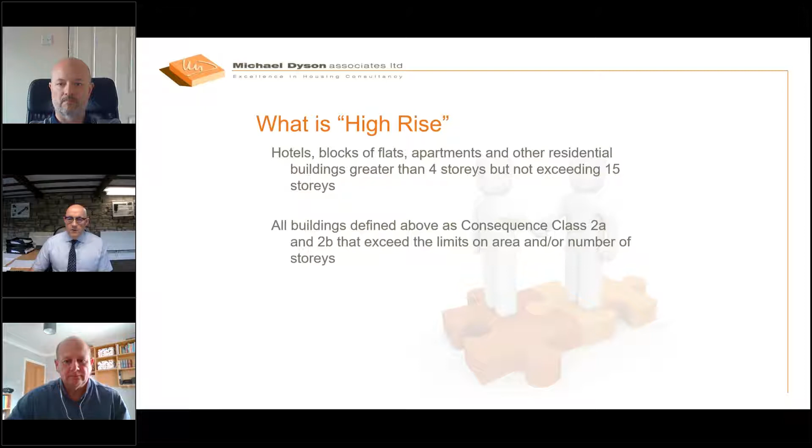Okay, what is high rise? It's an important distinction because there are some differences in the way high rise is looked at. Since 1968, it tended to be anything over 5 stories, because the BRE was gathering information post Ronan Point, and they used 4 stories and above as a demarcation. But the major repairs allowance parlance is blocks of 6 or more stories. The home quality mark by the BRE refers to anything over 18 metres, but crucially, the building regulations refer to anything over 5 stories, and that's specifically in relation to disproportionate collapse, which does need consideration, and it's something I'll be touching upon later. So in terms of what constitutes high rise, it's around about 5 stories.

Then we had the tragedy at Grenfell, and suddenly there was a focus on an 18-metre mark, and all the mandates, letters and guidance focused on 6 stories and above. So we've got a little issue here: in terms of applying cladding and designing cladding and thinking about how it will perform, it's 6 stories and above, greater than 5 stories, or 18 metres. But interestingly, when you're considering the structure upon which you're hanging this cladding, you need to consider the 5th story as well, because that's a demarcation as far as disproportionate collapse goes under building regulation A3.

How many have we got? Well, I was struggling with this. I've looked at all sorts of sources, and the MHCLG currently publishes around about 12,500 high-rise residential blocks in the UK, of which 6,000 are in the social sector. There's no real definition on that. Reading on the subject, research by a chap called Michael Stratton says that around about 6,500 high-rise blocks were built post-1945 in the UK. But of course, there have been demolitions which have reduced that number. Current thinking, evidenced in various reports, is there's around about 4,000 high-rise residential blocks in the social sector at the moment.

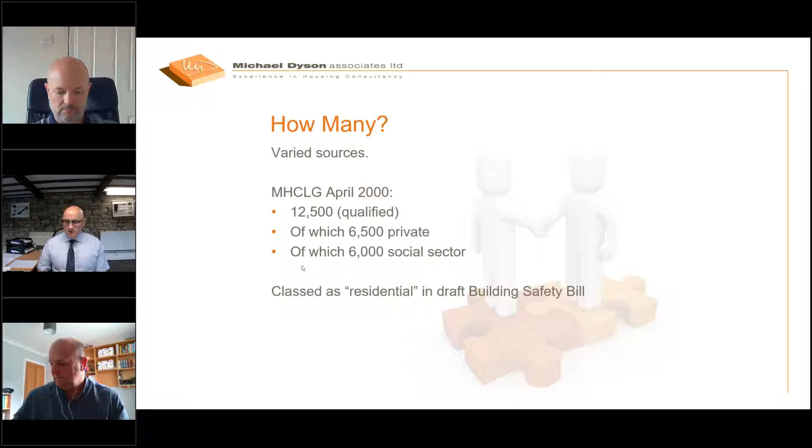So, why do you want to do it? Why would you want to reclad these blocks?

Well, there's a general trend here, and it's primarily to improve thermal efficiency and resolve the damp issues which are generally associated with 1960s and 70s design and construction. There are also benefits in protecting the substrate. These things have got envelopes in their original form or in later forms that probably don't perform as well as they might do.

So your new cladding system might be seeking to protect that substrate. If you're already spending money on responsive or even cyclical maintenance of, say, pointing or large areas of these blocks, then it's very tempting to want to put a cladding system on to get a fix and forget solution for the next 25 years. There's also the aesthetics to consider.

Obviously, we want them to look better. A lot of these things in their original form are quite ropey and unattractive. There's also considerations of other big investments. Why not put cladding alongside that, such as re-windowing or re-balconing these blocks?

And last but not least, certainly since Grenfell, there's the fire resilience issue associated primarily with aluminium composite materials, high-pressure laminates, and the presence of cavities and absence of fire breaks on these blocks. So there are lots of good reasons to want to invest in these blocks by recladding them.

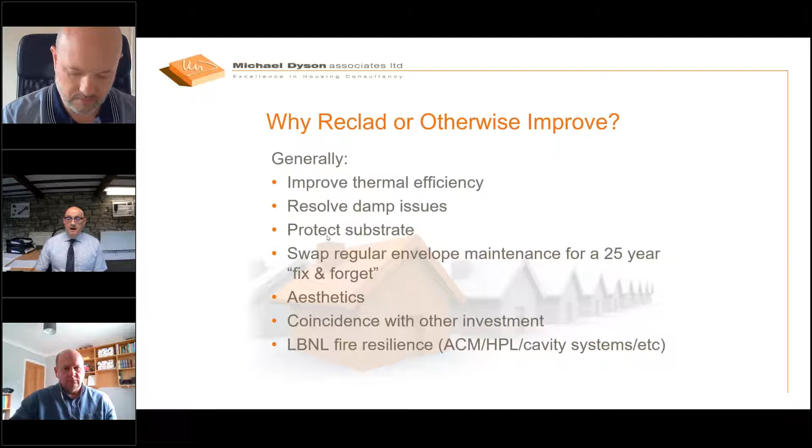Okay, general issues to consider. This is granny and eggs time. This is speaking as an engineer. This is more your remit than mine as housing managers and owners of these blocks.

But first of all, are these blocks viable in the long term on a business proposition? You need to think about current demand and changes in demographics. Do we want an elderly population rammed up on the 15, 16 stories of these blocks?

Also, a lot of these blocks require significant investment before you can actually work on them. So are they currently fit for purpose? And if not, what's that going to cost to deal with them?

And they are quite expensive to own. You've got conventional responsive repairs and so forth, but they tend to come in big hits, you know, wholesale renewal of kitchens and bathrooms, wholesale renewal of lifts, heating, power plants and so forth.

A lot of the blocks have concierge or security requirements. And also waste management. So they are quite expensive to own, and you need to balance that against the cost of doing something else.

And something that's sort of prevalent in social housing is the presence of leaseholders within these blocks. I'm sure you're all aware of the Section 20 provisions, and these people should be contributing to the upkeep of these blocks, but quite often they end up being investment blockers because they don't want to spend any of their own money. So that's something else to consider in general terms.

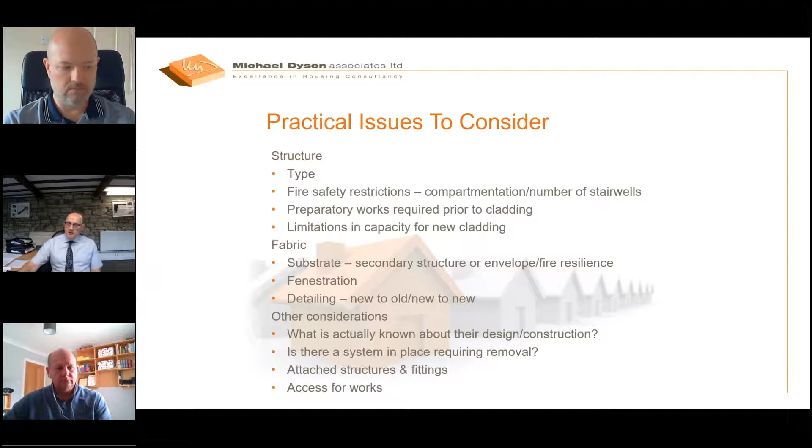And last but by no means least, in other considerations, you need access to do work to blocks. Do these blocks lend themselves to having mast climbers or scaffolding or other means of access readily available? And what provisions do you need to make, and how much will that cost before you can actually start sticking things onto the wall?

Let's talk about structure. I've just used two general types, framed and shear wall or cross wall construction. Frame structures tend to be steel or concrete, and shear walls and cross walls tend to be concrete or concrete and another material. But quite frankly, in our experience, it's mostly concrete. And in frame structures, you have in situ concrete frames, and in shear wall or cross walls, they tend to be large panel systems or LPS.

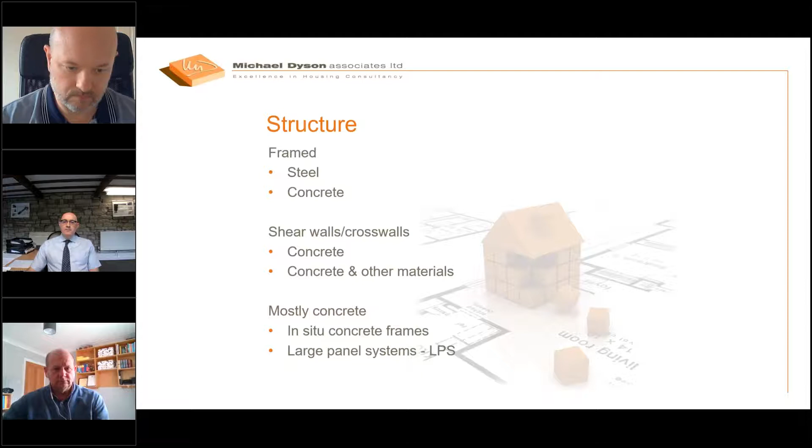Frames are more resilient against disproportionate collapse because they offer alternative means of rerouting loads in the event of distress, and they're generally well tied together in any event. But they only offer limited primary fixing points for cladding systems, such as the slab ends and the faces of columns.

Large panelled systems present issues relating to disproportionate collapse, and, again in our experience, they often require some kind of structural improvement. But they do offer broader fixing options for retrospective cladding, because by definition the envelope is structural. And for those of you not familiar with what these things look like,

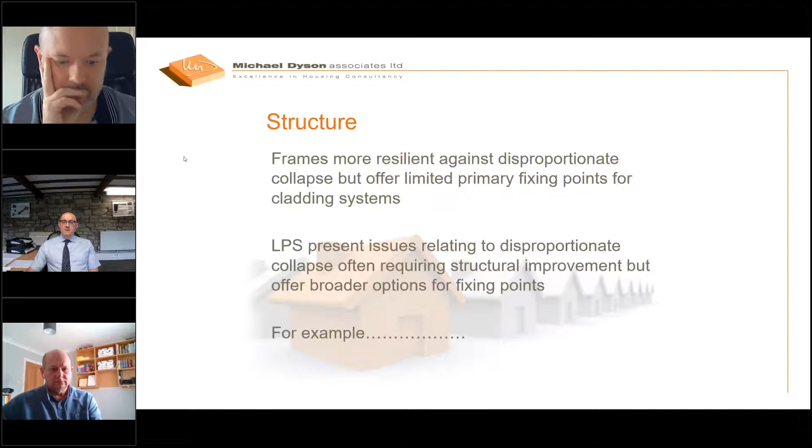I've chosen a Wimpey no-fines style of construction, which is generally reinforced in situ concrete frame, and between the columns is no-fines concrete to create walls, primarily on the envelope and also the compartment walls inside. And the whole shebang is usually overlaid with no-fines concrete and rendered over. There are exceptions to that.

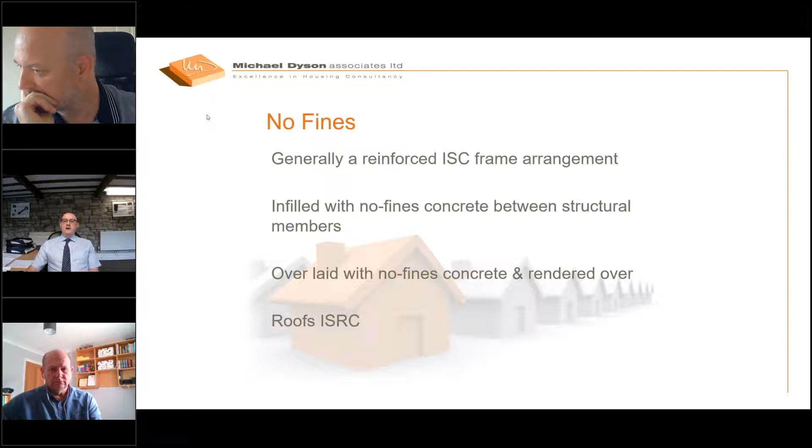We've seen no-fines blocks with brick outer skins, but in general terms, you can see a perimeter of a block supported by columns, and you've got columns within the footprint, which also provide the means by which walls are composed in no-fines concrete to create compartments.

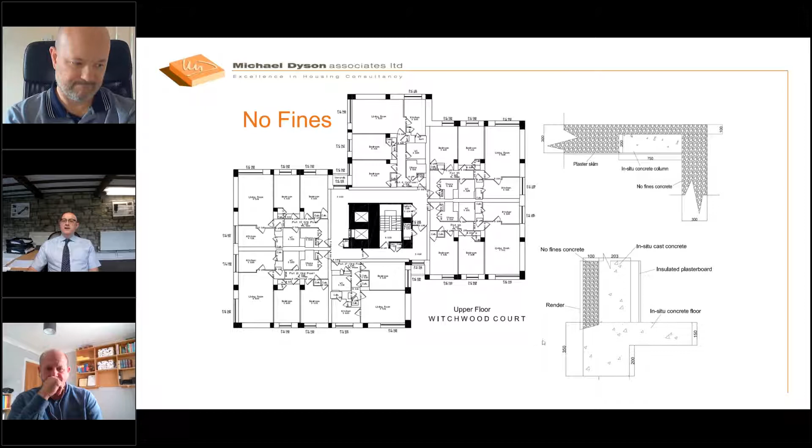And the way these look on plan is there's a column, and typically the no-fines wall, that's the outside, that's the inside, the no-fines wall will spread across the face of the column, obscuring it. And then on top of this lot, there's typically a rendered finish. And looking sectionally, it looks like that, which is basically a solid no-fines concrete wall placed between reinforced in situ concrete columns, joined monolithically to the reinforced concrete slabs.

I've chosen a typical LPS block of Reema to show you these. These are referred to as gravity structures. It's basically self-weight that holds it together. There are fixings between panels, between walls to walls and walls to floors, but these are more associated with putting them together, bringing them onto site and dropping them from cranes and locating them.

So there is some restraint offered by these fixing systems, but by and large, it's the gravity that holds them together. Therefore, there's a reliance on correct placement of the panels and what they call dry pack mortar, where they ram mortar beneath the panel feet to make it a tight joint with the floor. What does that look like?

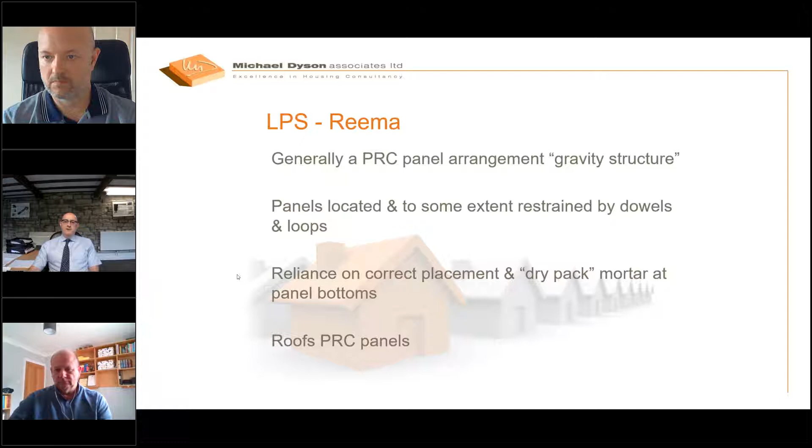Well, I picked a nice easy one. It's a big square, and we've got what we call flank walls. These are the primary support walls, you'd normally refer to them as gables. And then across, hence the term cross walls, we've got concrete panels creating the walls between and obviously forming good solid compartments. On the Reemas, we've also got walls running perpendicular to that, which spin from a central core, which sometimes is of in situ concrete, and on a Reema is generally in precast panels.

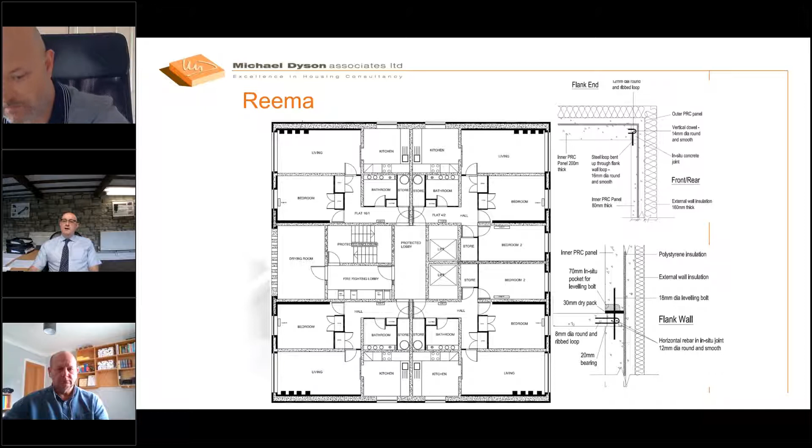Looking down onto a joint between panels, you can see loops that join those together, and looking through a cross section at the same point, you can see there are hoops that come from the floor. We've got dowels that run along between a cutout joint and then the dowels that you see there. And in terms of what they look like, that's not particularly tidy, but it is an effective joint between two panels in a Reema block.

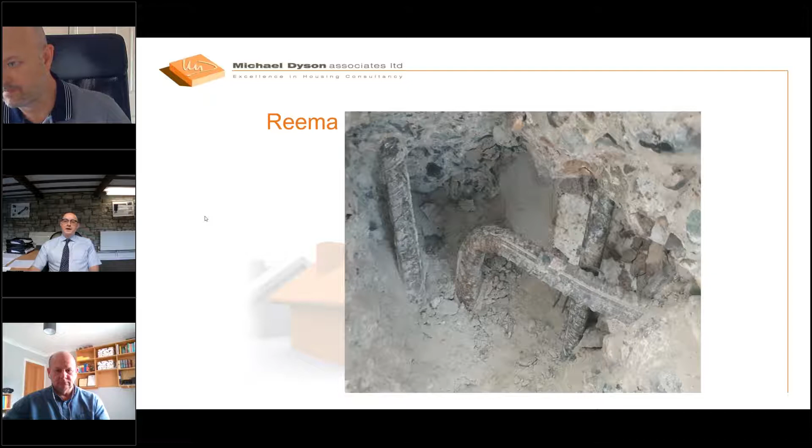I think at this point it's worthwhile talking about normal and accidental loading, because one of the key issues for large panel systems is disproportionate collapse. Normal loading is anything that's predictable. That's its self-weight, the use, that's the people, the furniture, the plant and so forth, wind loads, positive and negative, snow, and even retrospective cladding. Even though it's an eccentric load, it's still classed as normal because you designed for it. It's normal because you can understand what it's doing to the building and you can accommodate it.

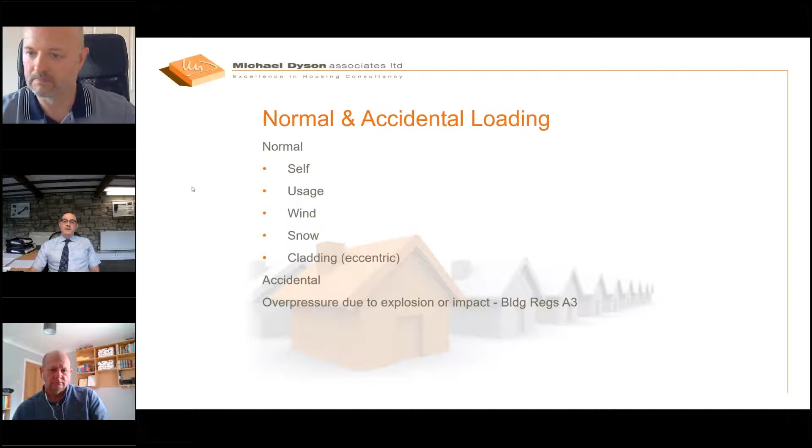Accidental loading is referred to as overpressure due to explosion or impact, which relates back to the building regulations. What that basically means is an unforeseen explosion of a certain magnitude. Town gas can exert something like 34 kilonewtons per square metre, and bottled gas can exert 17 kilonewtons per square metre. So we have benchmarks for how much overpressure a block can withstand without being able to redirect loads, and they're established in manuals that have been drawn up by the BRE, and they're referable.

So how do we deal with normal and accidental loading? Well, primarily through the original design. If you're looking at a block that was constructed in 1960, then it's been there 60 years. So by definition, it's coping with normal loading. You don't need an engineer for that. But if you're putting something new onto it, whether it's cladding or it's air source heat pumps or some mast installations for communications, you need to accept that as a normal load and accommodate that new load with some new provision.

Accidental loading is something quite different because it's unforeseen other than in its magnitude. So you're concentrating on tying and redundancy. If a structure can demonstrably be seen to be tied together properly and there are alternative load paths to be transferred in the event of a component failure, then you'll satisfy the requirements for accidental loading. And that's typically associated with framed structures. Unfortunately, with large panel systems, the panels are actually the source of the direction for loading. So if a panel goes, everything falls down and you get the progressive collapse that's associated with Ronan Point. And that's very, very difficult to overcome.

And so alongside introducing new measures such as tying and introducing columns and so forth to redirect loads, it's important to understand you can manage risk, the likelihood of occurrence. In the calculation for risk assessment, the outcome can be very, very severe. An explosion will be very severe in its outcome, its degree of harm. But if you can close the gap for the likelihood of occurrence by removing gas, by managing people taking bottled gas in there, removing people who've got medicinal gas and so forth, you are managing the risk and reducing the likelihood of occurrence. So there's a strategy that's structural and managerial associated with managing accidental loading.

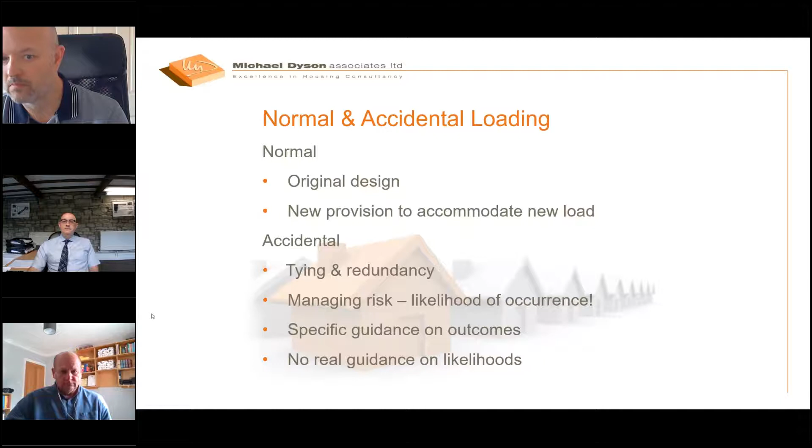What about fabric? Well, what's the condition of the fabric? Does it need stabilising, patch repairing? Do you need to retrospectively tie it back? Can you fix to or fix through? Can you fix through the fabric to a structural component, or do you need to fix to it? And if that's the case, you need to think about a strategy for making sure that envelope can carry the weight you're putting on it. You'll have issues with mason's openings to do with cold bridging and future renewals. If you've got a lifespan of a cladding system that exceeds that of the windows, you want to make sure you've got provision for replacing the windows mid-life of the EWI.

You'll have issues with rainwater management, not least if balconies are left exposed, you need to route the water somewhere. And also plain and simple rain washing down the outside of a block. If you've got absorptive materials, you'll end up with lots of staining and things like that. So think about things like that.

Think about the detailing. You're putting something on that's going to be of various thickness onto the outside. If you've got a fairly rectangular scenario like the Reema block, happy days, not a problem. If you've got something that's H-shaped or fairly complex in footprint, then you've got a lot of issues to overcome in detailing a relatively thick material and making it work in terms of applying it, in terms of maintaining thermal movement differentials, and also for maintaining fire breaks.

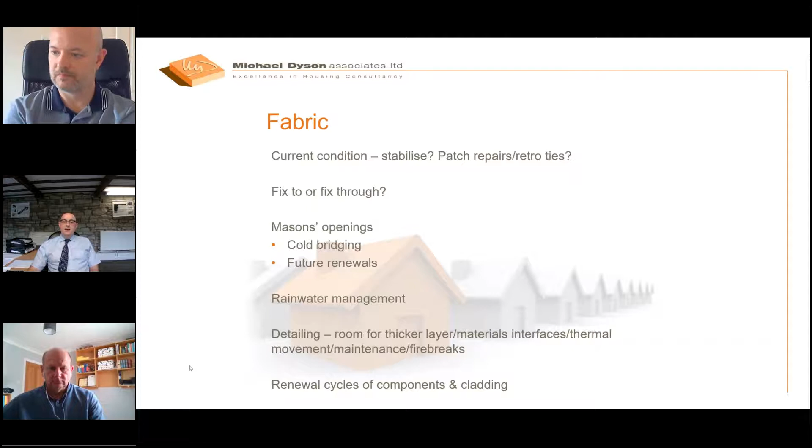So choosing the correct system. Again, in my noddy way, I've just broken it into two different kinds: rail systems, which go on rails, and direct fixed systems, which are stuck direct. Pretty simple, but essentially you get rail systems where the rail is fixed to the outside, and typically they're fixed to spanning systems, so they go to the ends of slabs, so you don't have too much to worry about the envelope, and they're generally referred to as rain screens or something like that. And the direct fixed system goes straight onto the outside of the envelope, an external wall insulation, EWI.

And amongst all the other things you'll think about, the primary ones are satisfying building regs, fire resilience, the ability to fix it to what you're fixing it to, the thermal characteristics, how you're going to maintain and ultimately renew it, what does it look like, and also warranties and insurances. A warranty is probably only worth the paper it's written on. What you really need to look at is insurance-backed guarantees and third-party products that will allow you to go beyond the life of the company that installed the product. So that's a quick canter through the things to think about.

So I think we can safely say that all systems will work, won't they? So what's the problem? Well, the real problem that we've found through experience is understanding the structural characteristics of the block that you're working with. If you don't understand them, then you won't fix the right product. You need to understand where you fix it on the structure to make sure it will stay there. And something that I haven't mentioned, but I've left till last, is workmanship, because we can design as much as we like, get that right, we can choose the right product. If it isn't put on properly, we'll have major problems. And workmanship has been an issue that the construction industry seems to struggle with.

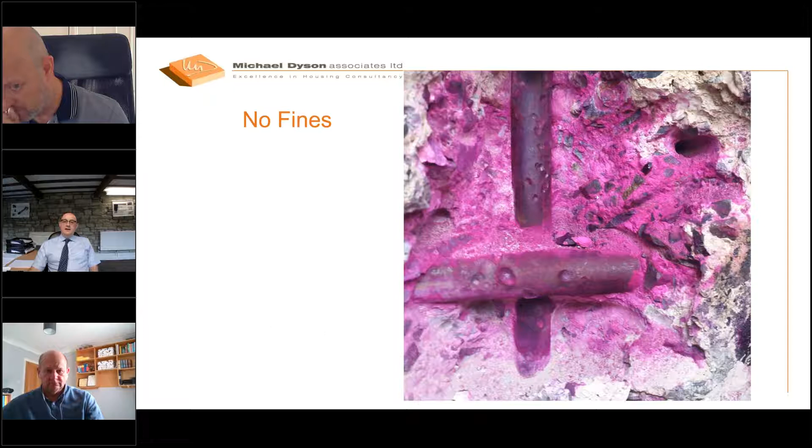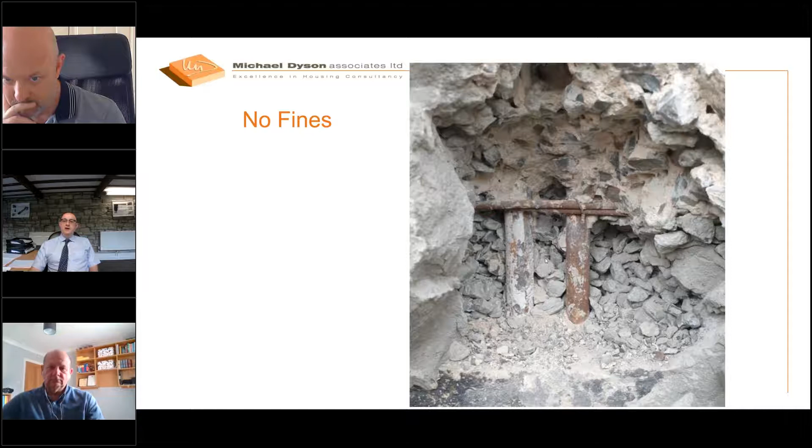You'll recall this slide from earlier showing you this lovely concrete and this lovely reinforcement. On the same block, on the same floor, 3 or 4 columns along, this column here has got the bottom missing because it's not been vibrated properly, the concrete hasn't dropped to the bottom, it's left the reinforcement exposed, and all you've got protecting that reinforcement is no fines concrete. Also, this reinforcement has got nothing supporting it in compression, so that's not really adequate as a resistance to downward forces.

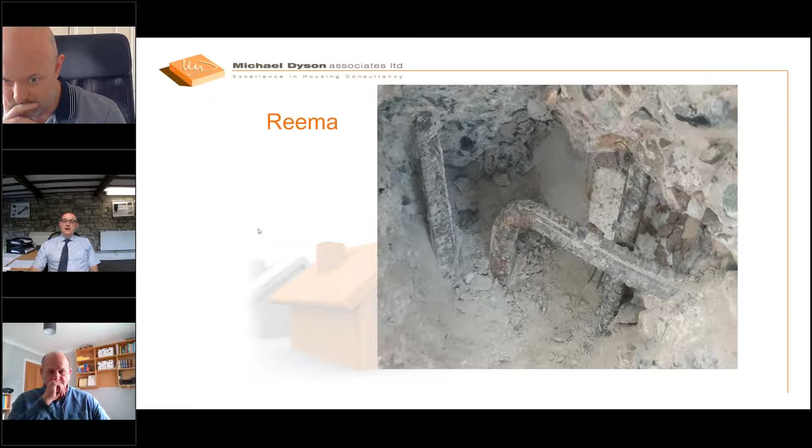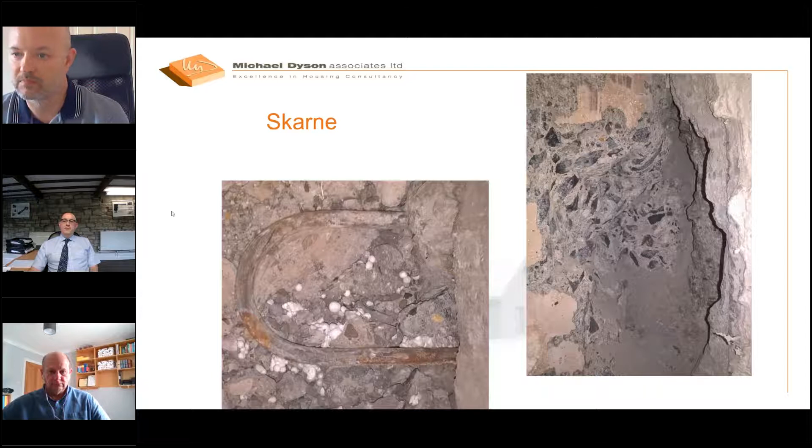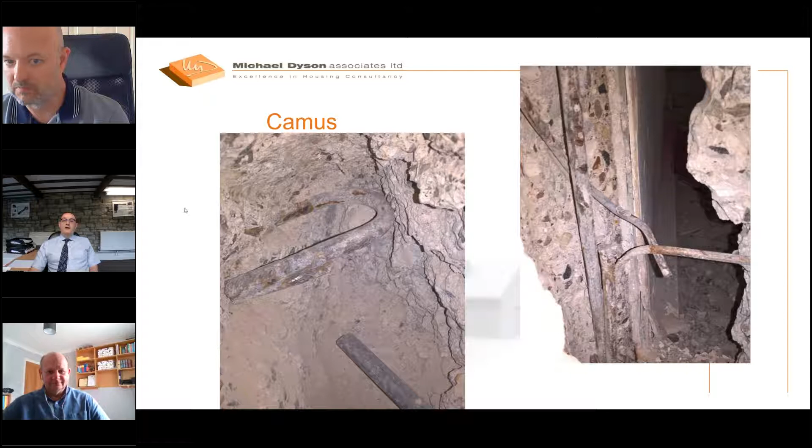On the Reemas, I showed you this rather attractive man-made joint here. Again, same block, we've got the hoop and we've got the dowel, and they're around about 50 millimeters apart. And it's not just on Reemas. We've got Skarne properties where there are hoops with no dowels. There are no hoops and no dowels. We've got Camus properties where obviously someone thought about it and decided not to follow through. And we've got my favourite. This is another Reema block. And somebody decided they couldn't get the two lugs to work together, so they've used a fork to try and wrap it around the two lugs coming into the joint.

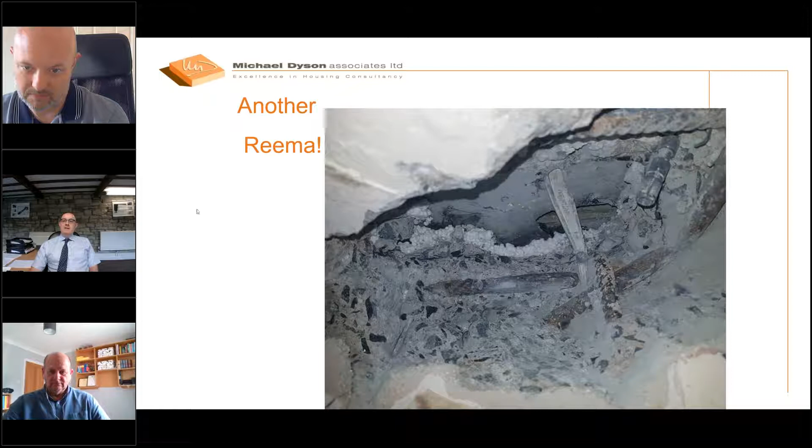At Grenfell, we're painfully aware of the workmanship issues there. It's widely publicised, so no need to dwell on that. But here's something interesting. This is from something that we've done within the last 12 months on one of our sites, where we notified the contractor that we were going to locate and test around about 70 fixings for pull tests, and we witnessed the installation and we witnessed the pull testing. And bear in mind that the contractor had fair warning of which fixings we were looking at. We had a 78% pass rate, which is a 22% failure rate.

So that's in the knowledge that Michael Dyson Associates are going to be looking at these. We had a massive failure. So you've got to ask yourself what was going through their heads when they did that. And what it has done is it's led us to the conclusion that we're going to have to do extra monitoring during the installation. So rather than just leaving them alone to get on with it, we're going to be policing this job very closely.

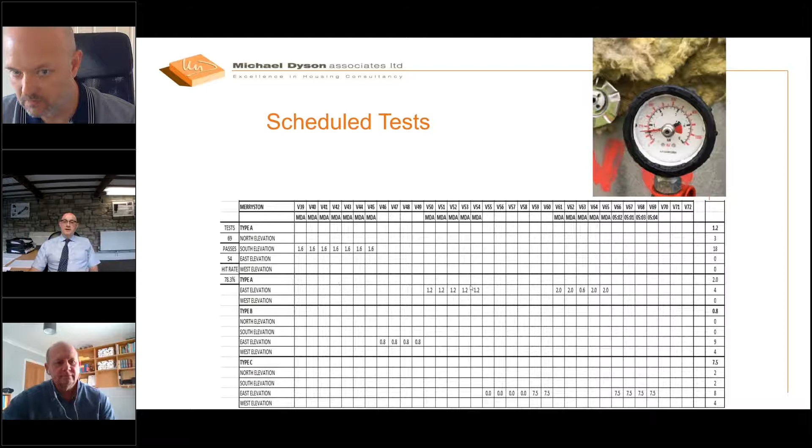So I'd like to close, hopefully approaching 20 minutes, with a to-do list. And the to-do list is this. First of all, substantiate your business case. Very important, verify the structure and the fabric of the blocks you're looking at and test its structural capacity. We then recommend you test its resilience in fire. That's the substrate and the new cladding. And we recommend the involvement of a fire engineer, which will probably become mandatory in any event.

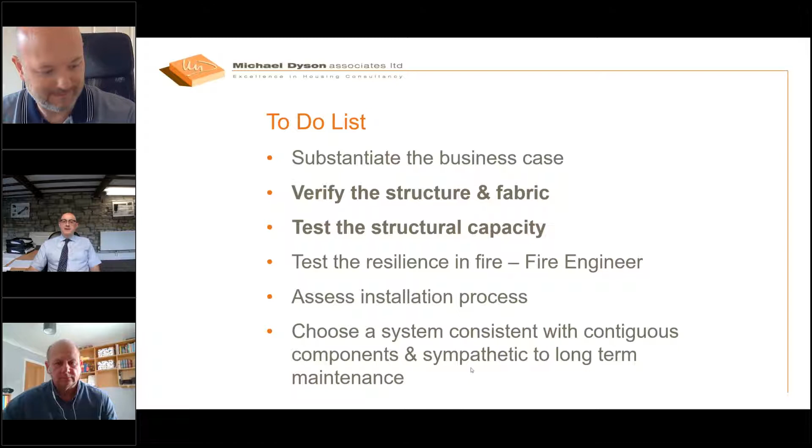You need to look at the installation process and say, can it be done? It's okay drawing something up on a tech sheet and saying your spacings are this, but when you're looking at 60-year-old concrete and 60-year-old bricks and things like that, make sure you understand the difficulties that the people on site will experience and combat that at source. And therefore, choose a system that's consistent with contiguous components, and by that I mean recognition that they will touch each other, and that is sympathetic to long-term maintenance.

We also recommend on your to-do list, get involved with the manufacturers of the system early doors, and also the people who do the fixings, because they're not always the same. And so make sure that the people who manufacture and possibly install the system are talking to the people who provide the fixings. Look at the wind loads. There's a lot of lip service paid to wind loads. It's there for a purpose, it's done for a purpose, and it's to actually modify your fixing patterns. So understand that and make sure you carry those out.

And then two more big ones. Test the fixing system before you commence in earnest. So pick samples as we did and test them in situ and make sure that A, they're the right fixings for the job, and B, that the operatives know what they're doing on site. And then when you're on site doing the works, test the fixings throughout the construction period. Likewise, check interfaces throughout, seals, areas of thermal movement and so forth.

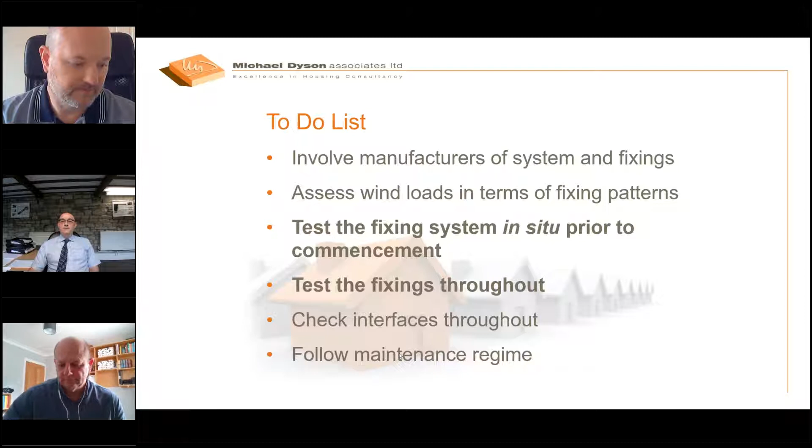And last but by no means least on this to-do list, follow the maintenance regime. If you've got a product that's got a BBA or other warranty for 25 years, the small print might say you need to go back in year 12 and change the seals, you need to go back in year 12 and change the grommets, da-de-da. If you fail to do that, you'll void the warranty. So make sure you understand your obligation as the purchaser of this system.

And I got a bit carried away now. I've also done you a to-not-do list. This is what we think you shouldn't be doing. Do not assume anything is standard. Even if you've got as-built drawings, check it out. Don't assume a secondary structure such as a brick envelope or no fines concrete is any good for fixing. It might be, but don't assume. Check it. Never assume good workmanship in construction.

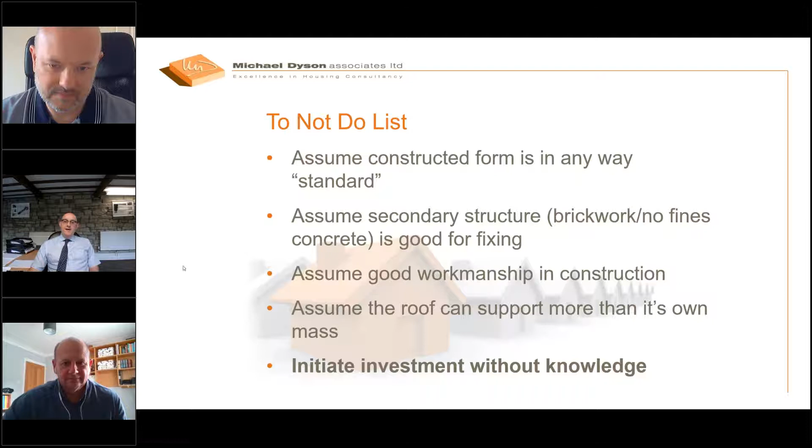And just as an aside, we come across this a lot, and it wasn't really in the remit, but I've stuck it in. Never assume a roof can support more than its own mass. That's a big mistake. And finally, with respect, don't initiate investment without knowledge. And that's it. Thank you.

Thanks very much, Gary, for that. Just got one, well, two quick comments. The one's really a statement, and I think you've actually just covered that, which is around it's necessary to check construction on site and not rely on design drawings, as buildings are not always built as they were supposed to. And again, I assume that you will endorse that. Absolutely. Make sure you have a good look.

Before going too far. The manufacturers publish test tables for sampling rates, and the BRE, theirs goes back, I think, to about 1987. It's an old one, but it's very good, and it's got a tiered approach. So on smaller jobs, I think it's geared for, the first 20 are done at like 10%, the next 20 are done at 5%, and so forth. We'd recommend doubling that and really making it a front-end curve, because you're not only testing the fixing, you're making it clear that people installing these things are going to be watched and policed. And so if you hit them at the beginning, they'll learn the lessons at the beginning and hopefully not repeat them.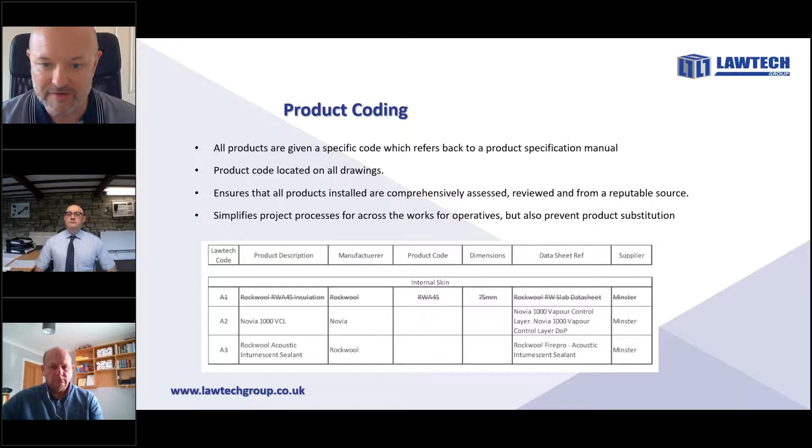So we can see here we have a product which is Novia 1000, which is a vapour control layer, and it's from a distributor called Minster. You can buy it from other people, but we select who we are going to get it from so that we know that we are going to receive that correct product. Secondly, once we've done that, we actually then photograph and we use graphical representation for the product, because it will turn up and it will be the wrong product and we need to protect against that.

So we have posters around the site. We have the coding in the stores. When it gets unloaded, it gets checked against the posters, because that's something that the men on site can understand. And that's again putting it at their level, and it's making sure that what we have delivered turns up. And this is something that we then make available to our clients to make sure they have the ability to check what products have turned up, and when they're on the scaffolding that they don't see something that someone's got out of the boot of their car and wasn't meant to be on site. So that's really important, getting the products right.

We then provide a grid system to our clients, which breaks down the quality control, how we're going to quality control it. This has changed recently. Because of the EWS1 form, we now grid it out per flat.

As a result, we are able to provide quality assurance packs per flat, which leaseholders now use when they sell their property, so that they have a fully documented, photographed control of what has occurred outside their flat. The grid system is put in place on the scaffold lifts against the flats.

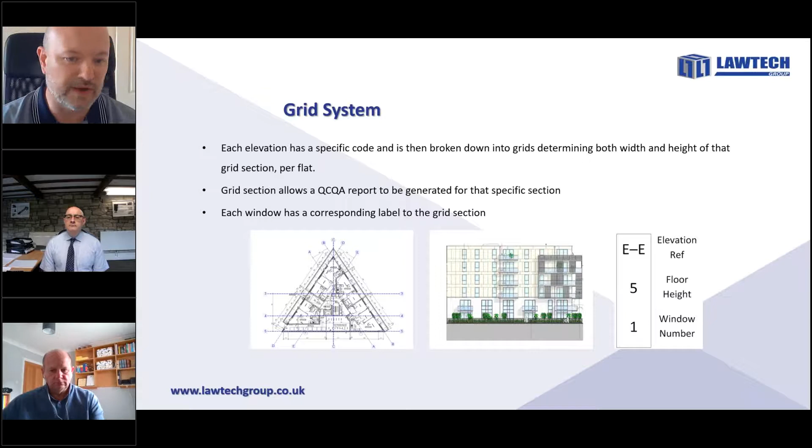What you see there, the photographic representation on that slide, is laminated in A4, and those are blue-tacked around the windows of the property and tied to the scaffolding, so that we know exactly where and when we are. So for example, on that drawing we're on elevation EE, at a certain floor height, next to window number 1 on the grid reference.

And that's how we're going to quality control the works. We then make all the drawings accessible on site, with A4 laminates of the drawings at various scaffold levels around the site, showing the crucial details.

Again, this goes back to the point of how often you see a man on site with an A1 drawing, clambering up the scaffolding, trying to work out what he's meant to be installing. Very rarely, if at all. So can you guarantee he remembers that detail? He needs to know what he's got to do.

If it changes, that gets updated by our quality staff on site. We have dedicated quality control people who administer the drawings and administer the process on the scaffold itself, to make sure everything is visible and direct.

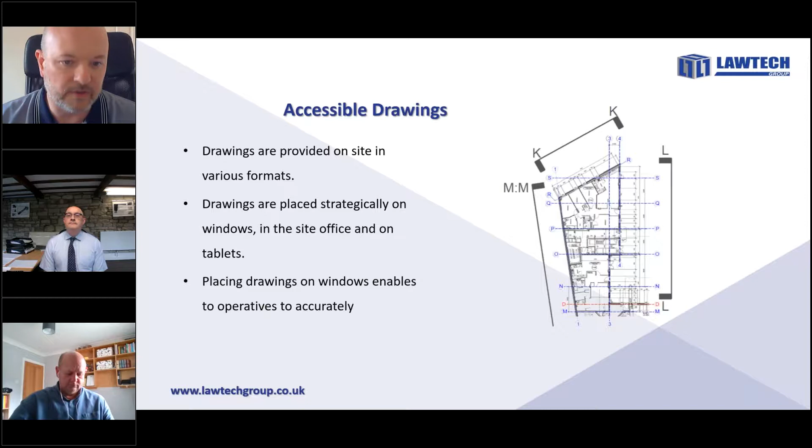At the end, this part of the building will look nice, but it's everything prior to that you will not see. That's the issue we're currently seeing, that the items underneath aren't necessarily what they're meant to be. So it's really important that a quality regime is brought into play.

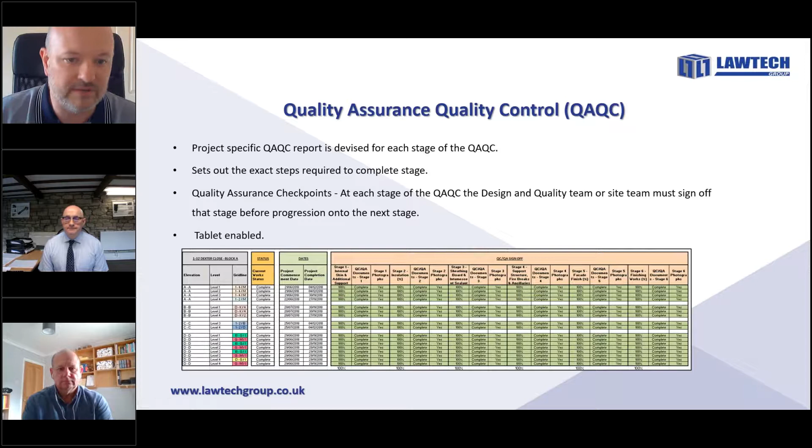It's important that we have a visual identification on the scaffolding, so we use color cards. Stage 1 is normally a white color card for us, giving a breakdown of what we're going to quality control. We then have stickers for work in progress, completed, or do not proceed, and we remove that card and change it for a different color card.

This helps the guys on site, some of whom don't have English as a first language, know that we've moved from the white stage to the blue stage, from blue to green, and so on, so they know what section they're working on.

We've also now implemented that each individual has an ID badge on site, with the color of the badge recognizing the stages of the systems they're allowed to install on our behalf.

I'd also like to point out that third-party accreditations are important, though some are much more important than others. We know we have to jump through the hoops for ISO 9000 and 14000. As chairman of SWIGA, I know how many hoops we have to jump through to be an installer, and there are different hoops for different systems and different high-rise, low-rise buildings.

But there are also accreditations, and I'm happy to name the Centre for Window and Cladding Technology, where to be a member you just fill in an application form and pay a fee. So I want people to be aware that some accreditations are worth it and some are much easier to obtain. Please find out for yourselves what people have to do to become members of organisations. We can all put stickers on our letterhead, but it's important you understand what they mean.